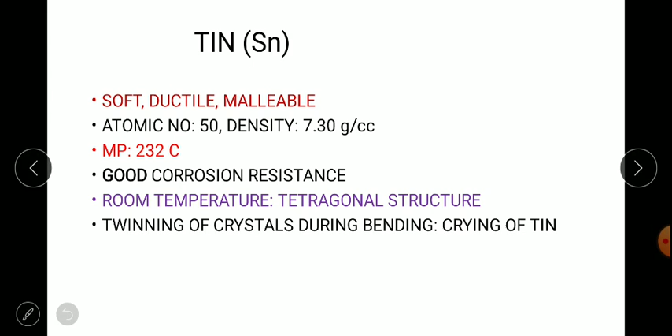So tin, Sn, is soft, ductile and malleable, with a melting point of 232 degrees Celsius and very good corrosion resistance. A specific property of this is twinning of crystals during bending. When the bending operation is performed, we get twinning, that is on the first part and second part. On both we have the same type of twinning.

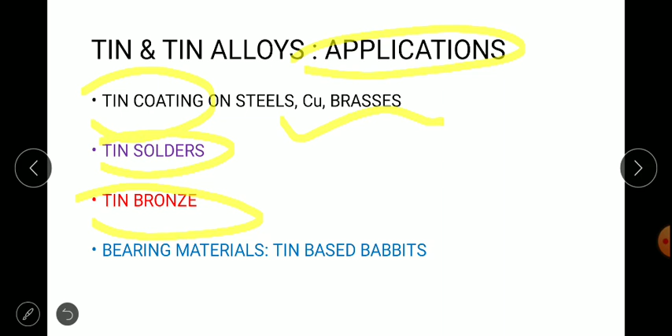So these were the following alloys which we discussed in the earlier part, that is, applications of tin. Now the names are provided based on applications. Tin coating is provided on steels, next we have copper and brasses which contain tin. Next we have solders of tin, bronzes of tin, and we discussed babbitts of tin.

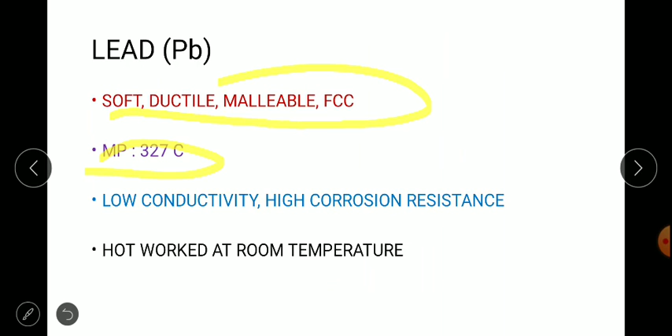We'll go for properties. The eutectic composition of lead and tin is known as tinman's solder or quick solder. So lead and its alloys are basically used for soldering purposes. Why? Because of its fast cooling, or we can say fast solidification. So these are used for soldering electrical devices.

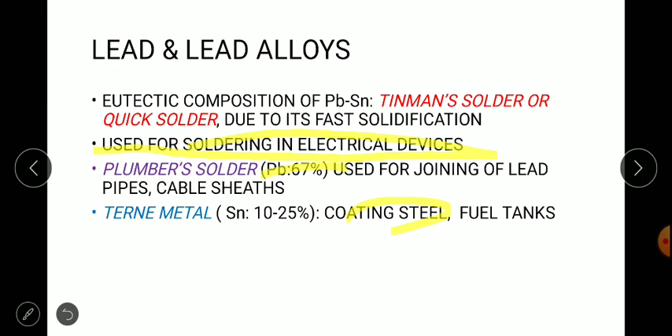Next we have plumber's solder, which contains 67% lead, used for joining pipes and cable sheaths. Then we have terne metal, which is specifically used for coating steels and fuel tanks, and contains 10 to 25% tin.

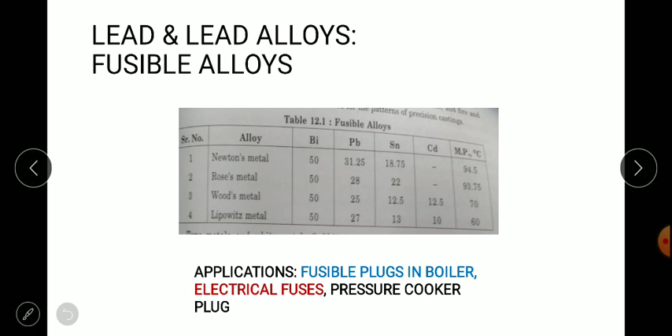It is also called fusible alloy, in which we have four categories: Newton metal, based on the alloying elements as shown, Rose metal, Wood's metal and Lipowitz metal. Applications are fusible plugs in boilers, electrical fuses and pressure cooker plugs.

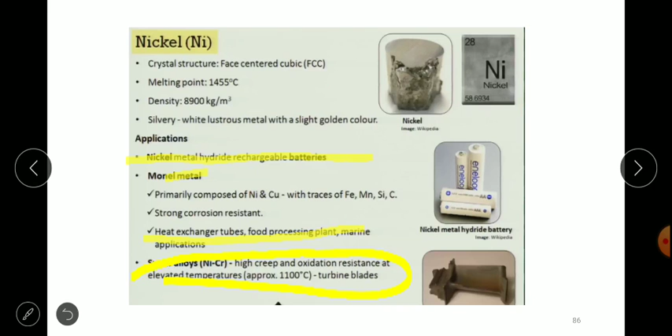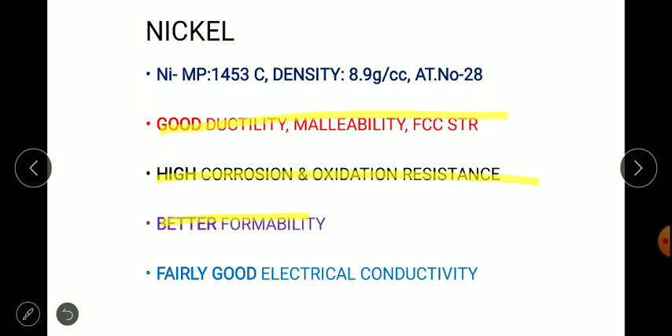Next type of alloy we have is nickel and its alloys. Nickel has a melting point of 1455 degrees Celsius with FCC crystal structure. It is specifically used in batteries, monel metal, food processing plants and marine applications. And since we have discussed super alloys, it is used in super alloys. It has good ductility and malleability, high corrosion and oxidation resistance, better formability, and fairly good electrical conductivity.

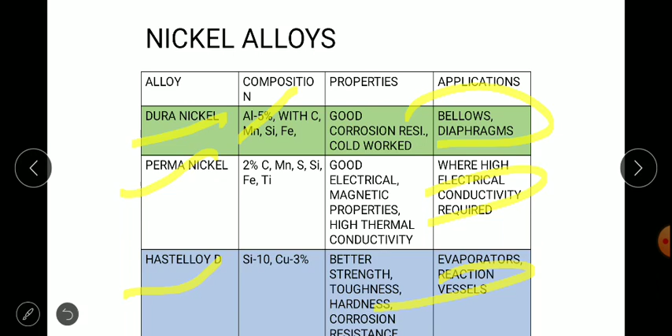First is Duranickel, which contains 5% aluminium as an alloying element and is used for diaphragms and bellows. Permanickel contains 2% carbon and has very good electrical conductivity. Hastelloy has 10% silicon and 3% copper, and is used for reaction vessels and evaporators. Monel metal is used for marine castings and valves, and contains 30% copper with 2% silicon.

Next we have Invar, in which 64% iron is present. It is used for measuring instruments and condenser springs. It has a very good property of low coefficient of thermal expansion. That's why it is used for measuring instruments, since they are not affected by thermal expansion.

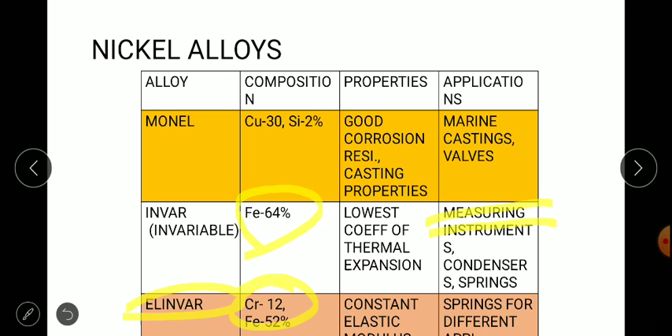Next we have Elinvar, which contains chromium in addition to iron: 52% iron and 12% chromium, which provides a constant modulus, so that's why it is used for springs. Nickel-chromium-iron alloys have 16% chromium and 24% iron. Electrical heating elements are manufactured from this type of alloy.

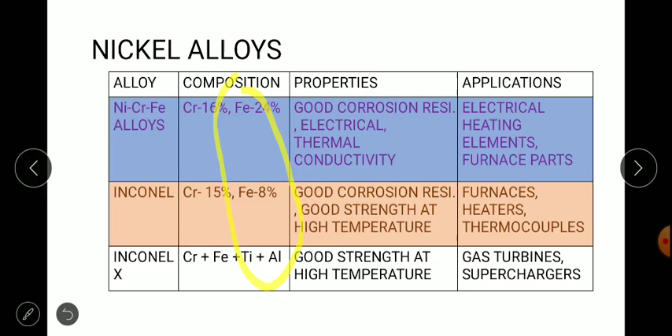Next we have Inconel, in which a minimum amount of iron is present compared to the alloys we discussed before: 15% chromium and only 8% iron, used for furnaces, heaters and thermocouples. Inconel X is used for gas turbines and superchargers. Alloying elements are iron, titanium and aluminum. If you observe, most of these alloys contain iron as an alloying element but not as the base metal.

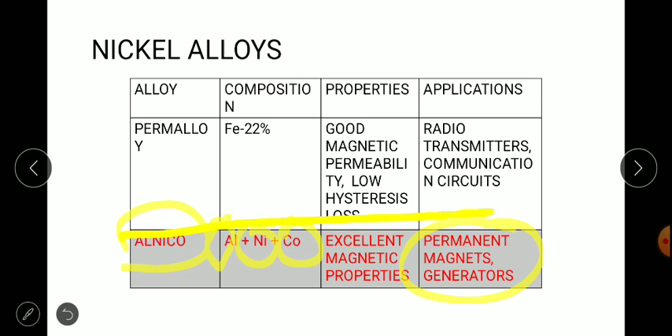Over here we have Permalloy, which has 22% iron and is applied in radio transmitters and communication circuits. Next, the last one we have is Alnico. The name itself indicates aluminium, nickel and cobalt; it has excellent magnetic properties and is used for making magnets. Very important alloy. So that's all for today's session.